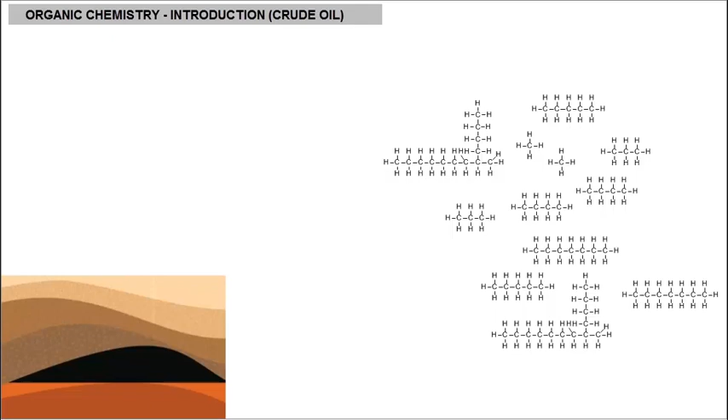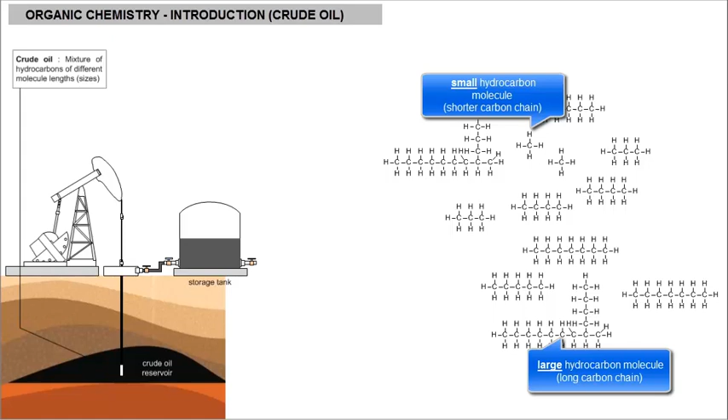They are called hydrocarbons because they are made up of hydrogen and carbon atoms only, and with different molecule lengths, thus sizes, their boiling points would be different. That is because the intermolecular forces acting between small molecules will be lower compared to larger ones. Therefore, a lower boiling point for smaller molecules, higher boiling point for the larger molecules, and thus a trend in the boiling points with respect to molecule size can be established.

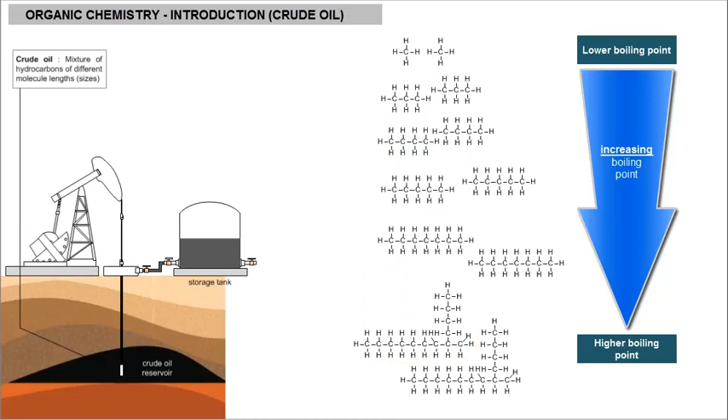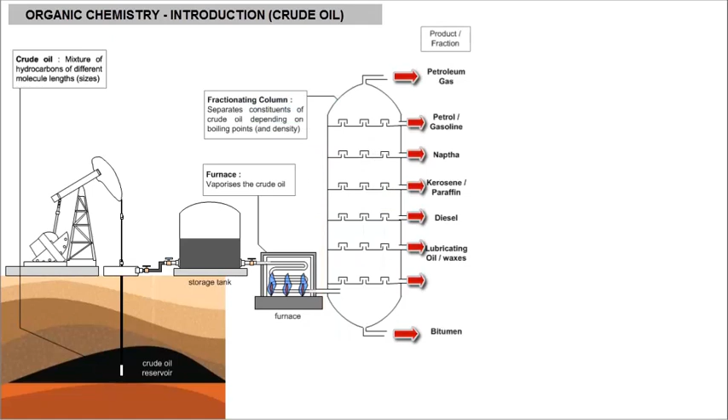This means the best separation technique for crude oil will be fractional distillation, where we take advantage of the various boiling points in the mixture in order to separate the constituents. The fractional distillation of crude oil is slightly different in its features and operation from the one that you might be familiar with in the chemistry lab. Here, the fractionating tower or column can be more than 60 meters high and has perforated trays that permit upward flow of vapor and help in the collection of condensed constituents into what are called fractions. Each of these fractions is also a mixture, but with a narrower range of carbon atoms per molecule.

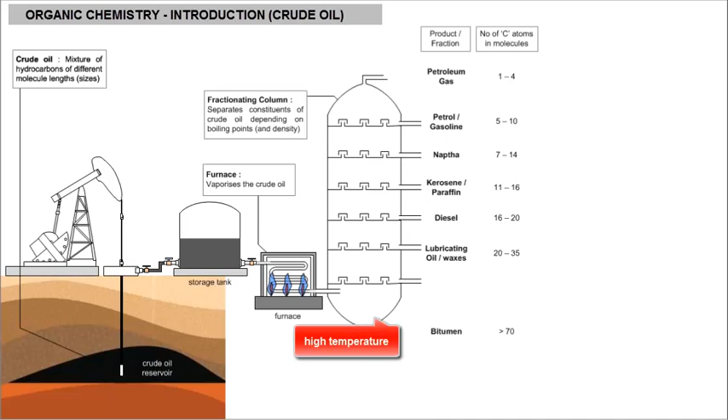In order to understand how we get these fractions, you need to know how the fractionating column works. The temperature at the bottom of the column is very high, while at the top it's much cooler. Therefore, a temperature gradient is set up, that is, a gradual decrease in temperature from the base to the top. The crude oil stored in large tanks is drawn out and vaporized as much as possible in a furnace. The vaporized crude oil is then fed into the fractionating column at its base.

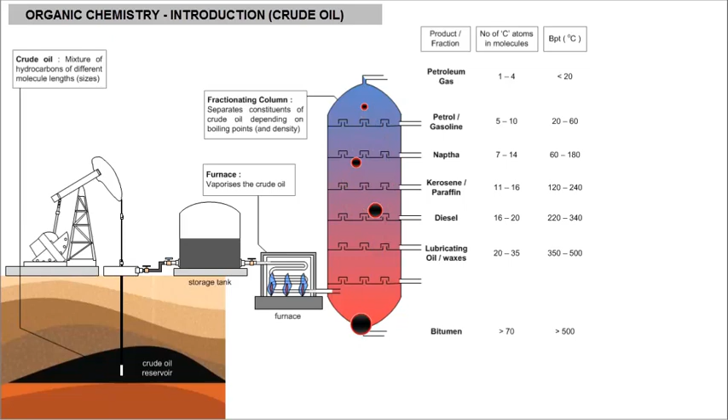As the crude oil vapor rises up the column, its mixtures, which are of different molecule sizes, thus different boiling points, will encounter regions of decreasing temperature. Once the temperature at that height is less than or equal to its boiling point, the hydrocarbon will condense into liquid state and is collected in its respective trays, hence fractions. The separation technique is thus based on density and boiling points.

Those hydrocarbons of small molecule size, thus low density, that did not condense, that is, remain in gaseous state as a result of their boiling point being very low, will continue to rise up and be collected at the top in gaseous state. Heavy hydrocarbons of large molecule size that did not fully vaporize as a result of their boiling point being very high will sink and be collected at the base of the fractionating column.

It is impossible to collect hydrocarbon of a specific number of carbon atoms. Instead, you get hydrocarbons of a range of carbon numbers, that is, number of carbon atoms, which basically gives you the size of the hydrocarbon. Higher the carbon number, larger the molecule. It is very important that you understand the trend in the properties of the various fractions that are collected as we go down the fractionating column.

The smallest and simplest of the hydrocarbons has one carbon atom in each molecule and is collected at the top in gaseous state. The largest and most complex can have up to 100 carbon atoms per molecule and is collected at the base in waxy or semi-solid state. Therefore, as you go down the column, the number of carbon atoms per molecule increases, thus the molecule size increases, resulting in an increase in intermolecular forces, an increase in viscosity, hence a decrease in flammability, and an increase in boiling point.

In terms of state and density, the fractions are collected in gaseous state at the top, therefore lowest density, liquid in between, increasing density, and eventually waxy solid towards the base, highest density. In terms of color, the fractions are colorless gases at the top, turning more and more brownish in liquid and blackish at the base.

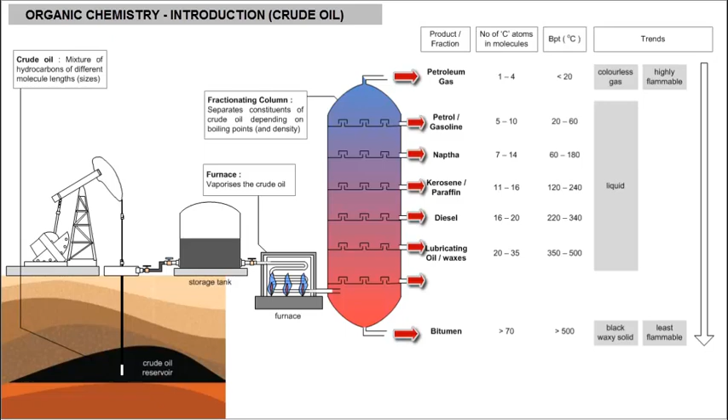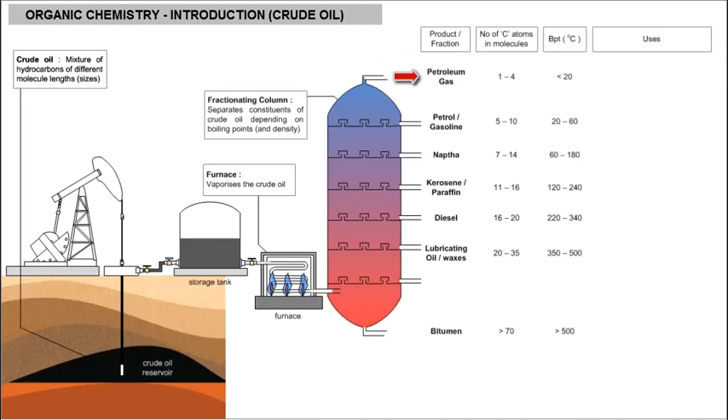There are names given to each of these fractions based on which part of the fractionating column the hydrocarbons are collected from. Those hydrocarbons with 1 to 4 carbon atoms are collected at the top as colorless gases, that is, they do not get condensed onto the trays, and are called petroleum gases, used as fuel for heating at homes and stored in gas cylinders. The next fraction is petrol, composed of hydrocarbons of between 5 to 10 carbon atoms. It is used as fuel in small internal combustion engines such as cars and other motor vehicles.

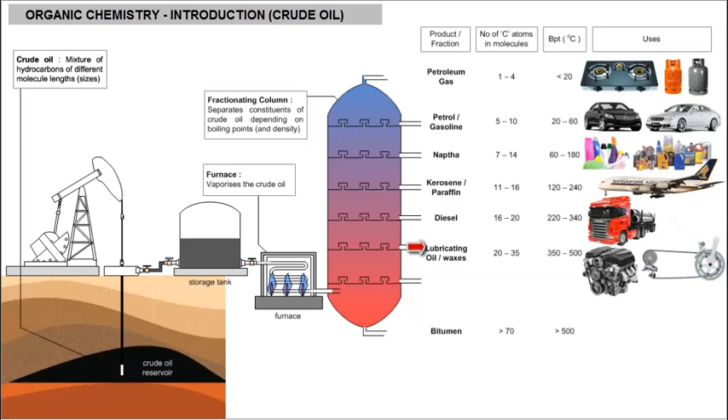The next fraction is naphtha, with about 7 to 14 carbon atoms, used as feedstock to the chemical industry, meaning it is used as a source to make other chemicals such as alkenes, which are then used in the making of plastics. Next is kerosene or paraffin, used as aviation fuel in aircraft engines. Next is diesel, used as fuel in heavy vehicles such as lorries and trucks. Next, lubricants and oils, applied between moving parts of machinery to reduce friction. And lastly, bitumen, a blackish waxy solid with the most carbon atoms, used in road pavements and roofing.

There are two very important points to note. Firstly, the fractions obtained from the fractional distillation of crude oil fall into a family, a homologous series of hydrocarbons called alkanes. They have single bonds between carbon atoms and hydrogen atoms bonded to them. You will be studying the other families and series in the subsequent videos.

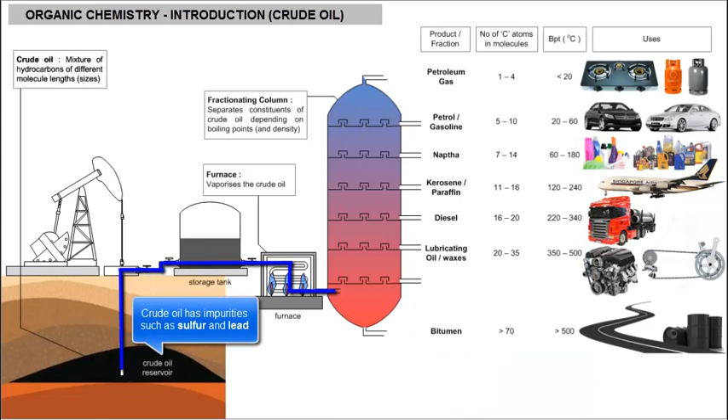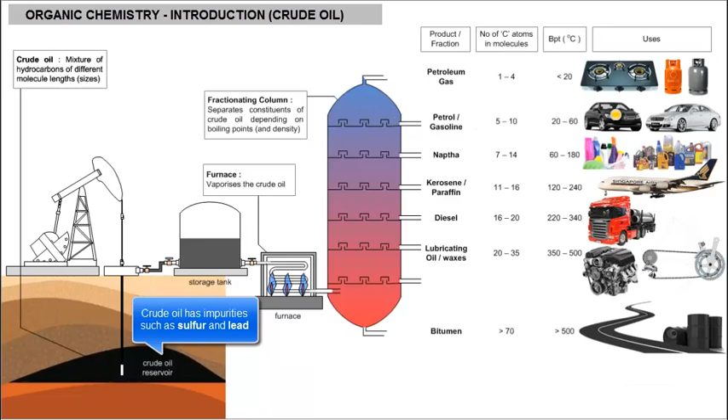Secondly, impurities do make their way into the fractions. For example, sulfur is found in crude oil and ends up in some of these fractions, and when they are burnt, like in petrol engines, it reacts with the oxygen in the air to form sulfur dioxide, a known pollutant that causes acid rain.